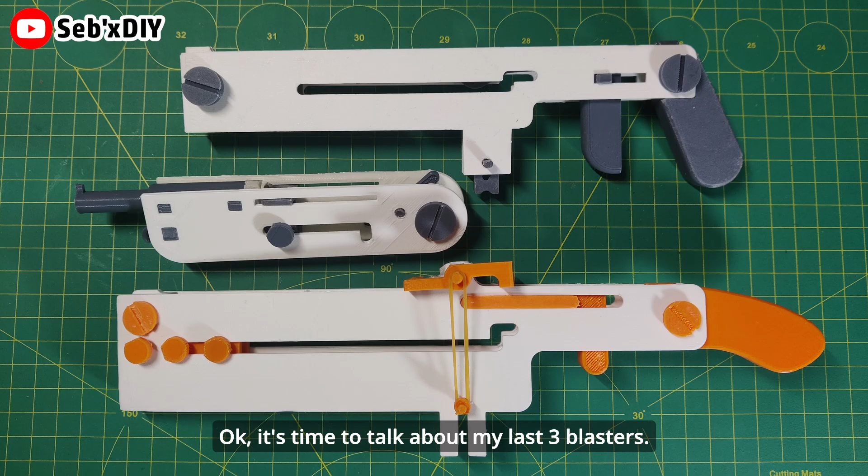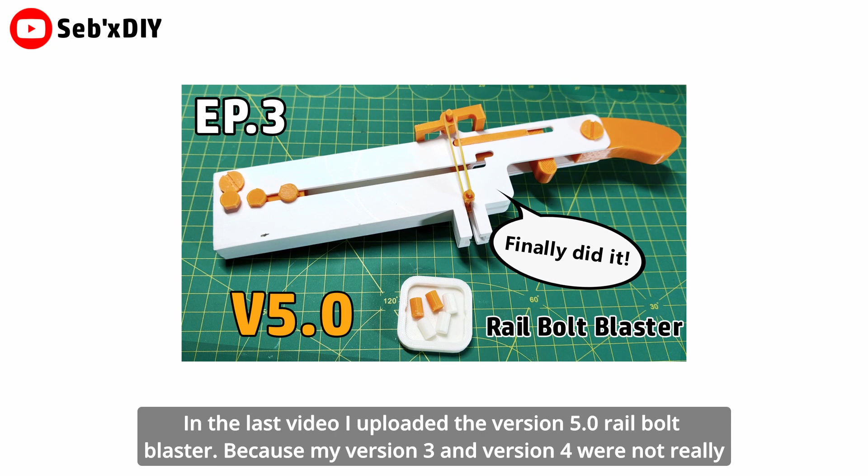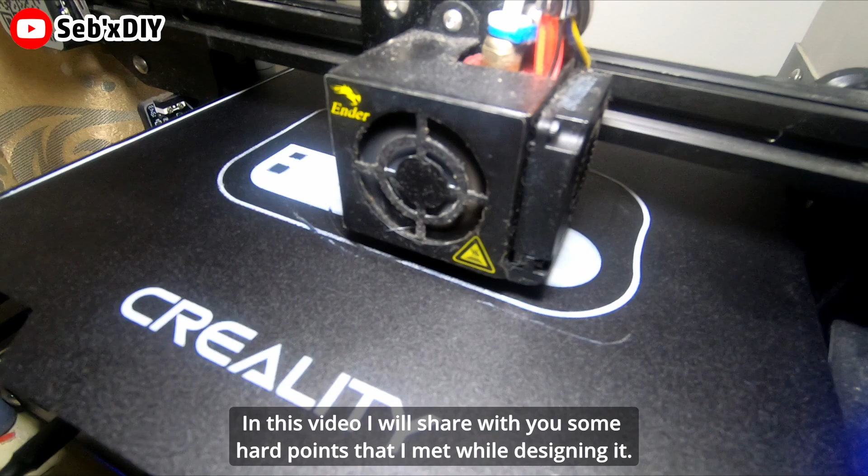Okay, it's time to talk about my last 3 blasters. In the last video, I uploaded the version 5.0 rail bolt blaster. Because my version 3 and version 4 were not really good, I had to continually upgrade my designs. In this video, I will share with you some hard points that I met while designing it.

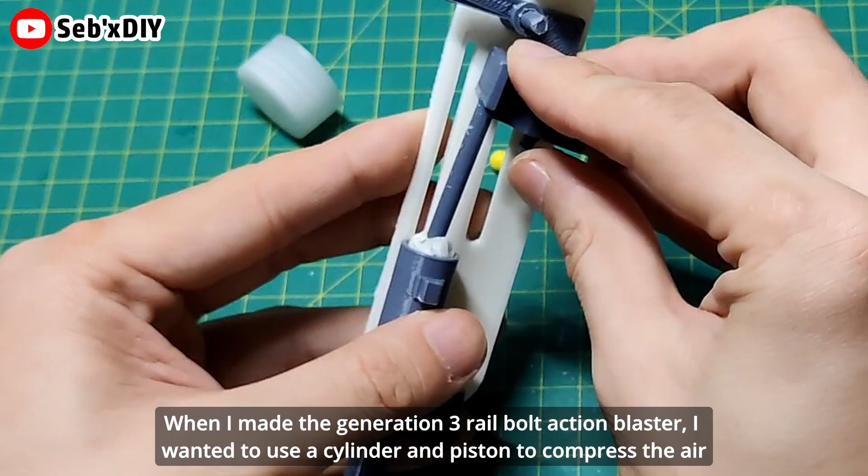When I made the Generation 3 rail bolt action blaster, I wanted to use the cylinders and the piston to compress the air and make the air pressure the power of the bullet, just like a spring power airsoft gun. At the same time, I chose 6mm soft BB bolts as the bullet.

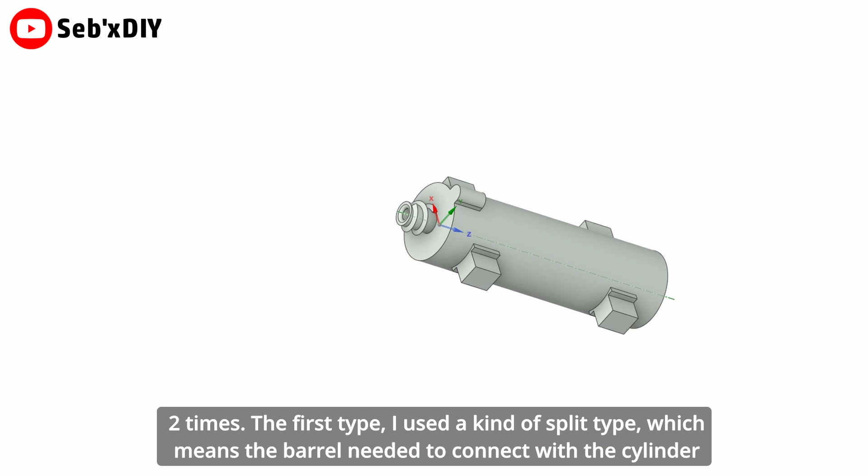Sometimes the plan might be good, but it does not mean the actual doing is smooth. The cylinder I even made 2 times. The first type I used a kind of split type, which means the barrel needed to connect with the cylinder, but because of the disadvantage of FDM type, the joint point between the cylinder and the nozzle was too weak, so the nozzle was broken.

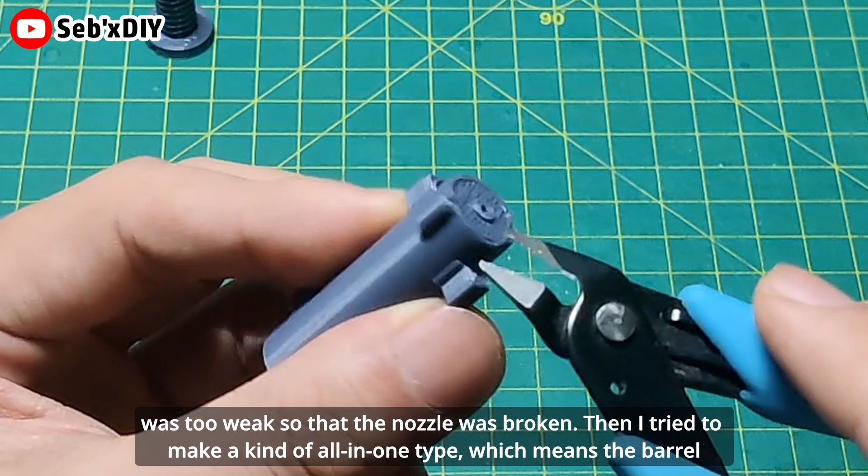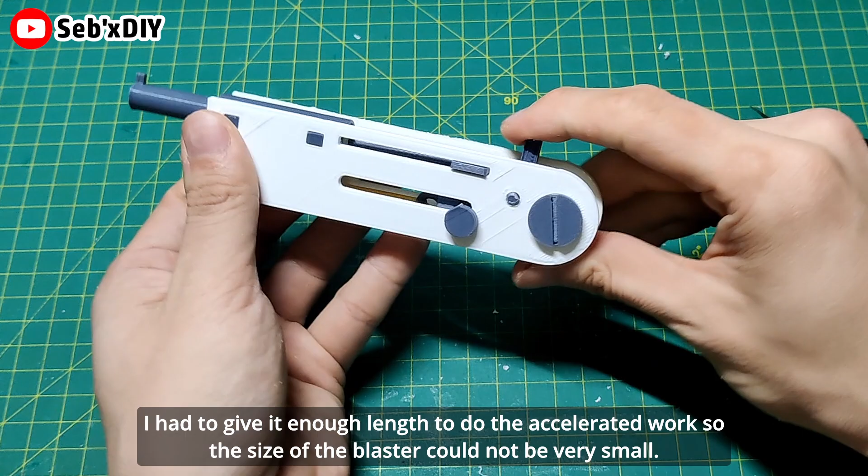Then I tried to make an all-in-one type, which means the barrel was fixed into the cylinder so it could have enough strong structure for the sealing effect, and surprisingly the printing time was not very long. At first I thought I could make a smaller blaster, but because of my 2cm diameter rubber band, I had to give it enough length to do the accelerated work, so the size of the blaster could not be very small.

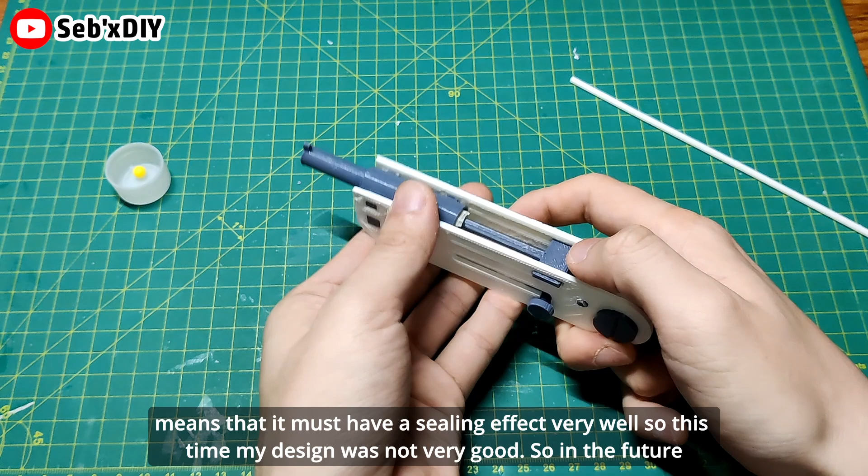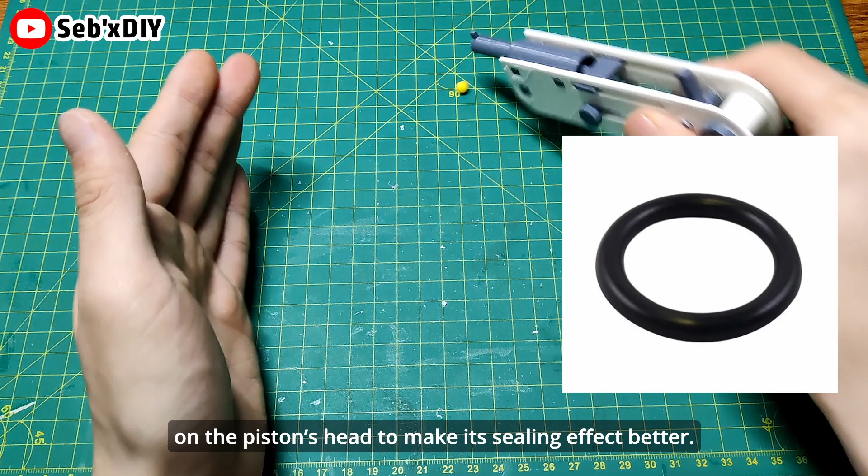Finally, for the version 3.0 blaster overall, it was not good enough, because I tried to use a smaller cylinder, and that means it must have a very good sealing effect. So this time my design was not very good. In the future, if I still want to use a small cylinder design to make a 3D printed airsoft blaster, I will use an O-ring on the piston head to make its sealing effect better.

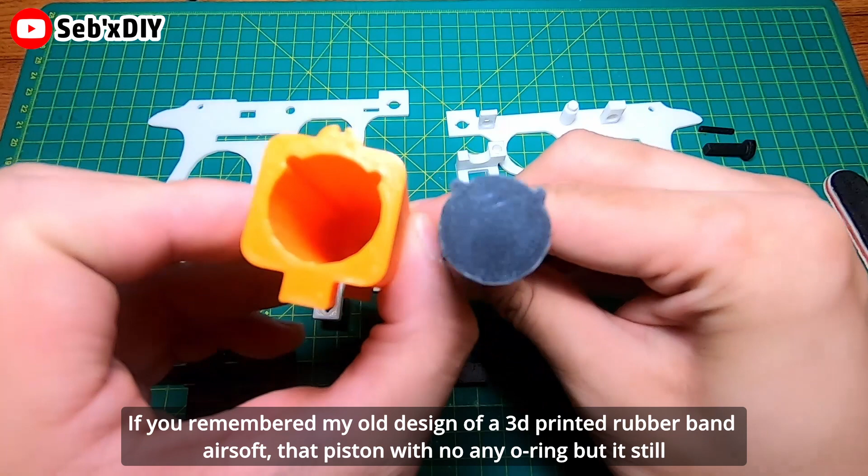If you remember my old design of a 3D printed rubber band airsoft, the piston had no O-ring, but it still would shoot out the soft BB bolts. Because the cylinder was far bigger and could offer much more air, even though it had some air pressure wastage, it still could offer enough air to blow out the BB bolts smoothly.

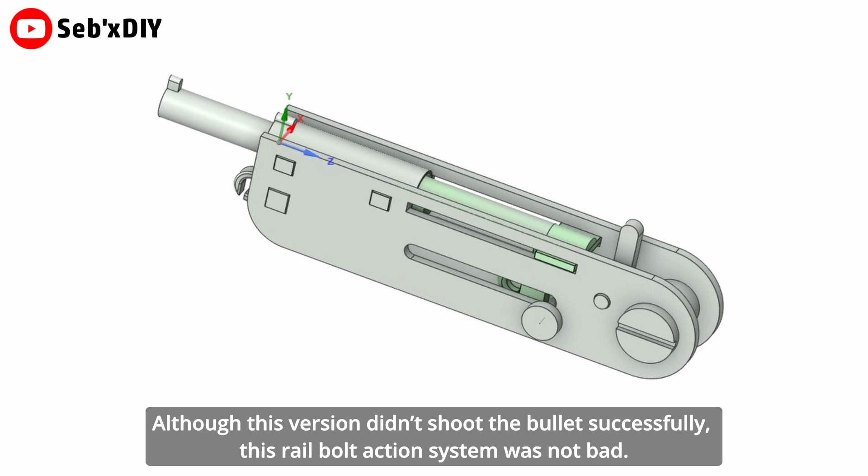Although this version didn't shoot the bullets successfully, the rail bolt action system was not bad. So after deeper training, I think maybe I can design a real 3D printed airsoft gun one day.

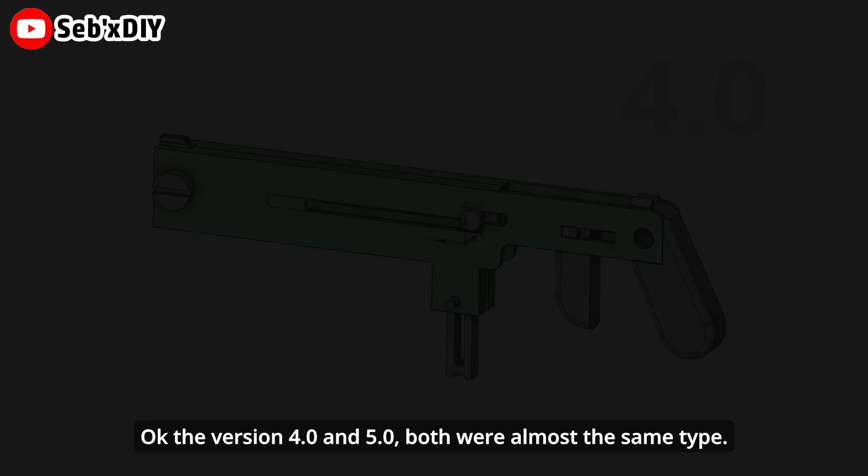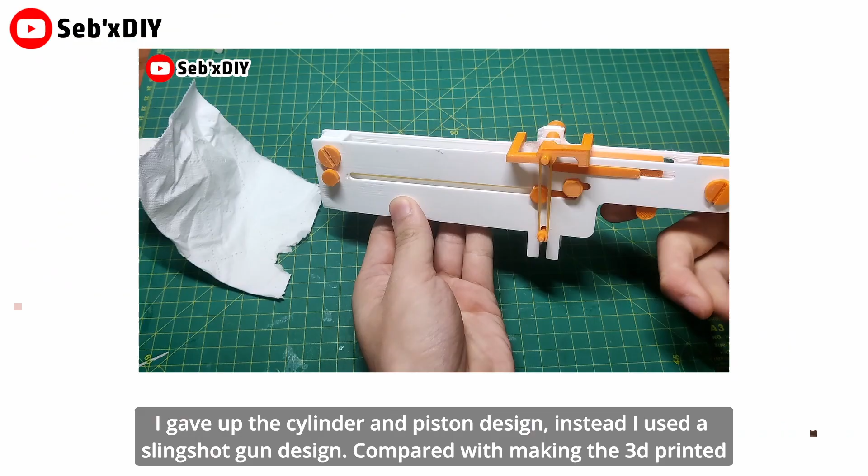Okay, the version 4.0 and 5.0 were both almost the same type. I gave up the cylinder and piston design. Instead, I used the slingshot gun design. Compared with making the 3D printed airsoft, I had more experience in making the slingshot gun blaster.

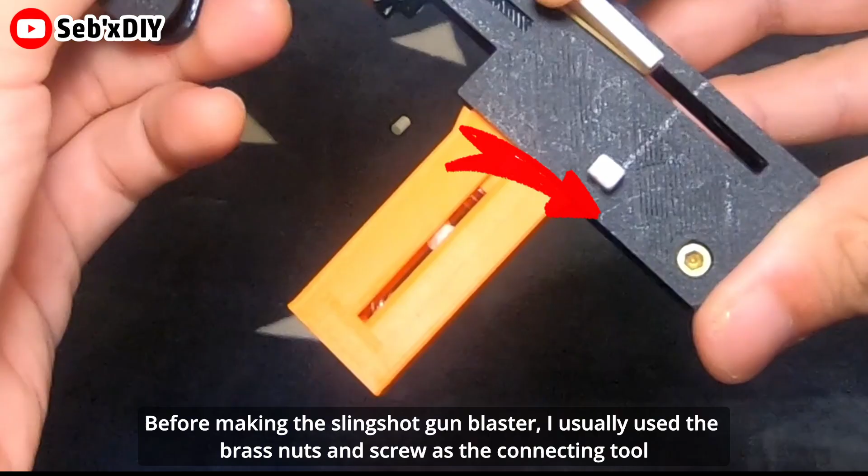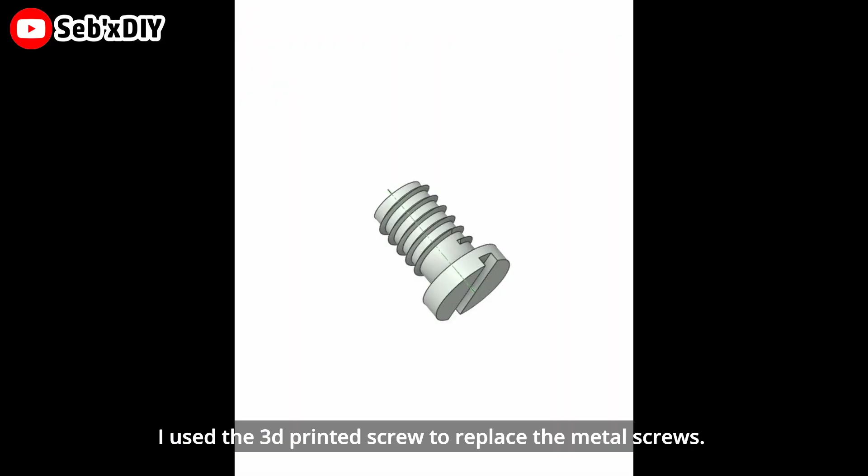Before making the slingshot gun blaster, I usually used brass nuts and screws as the connecting tool to put the parts together. But this time, I decided to design a 100% 3D printed blaster. In order to pursue this aim, I used 3D printed screws to replace the metal screws.

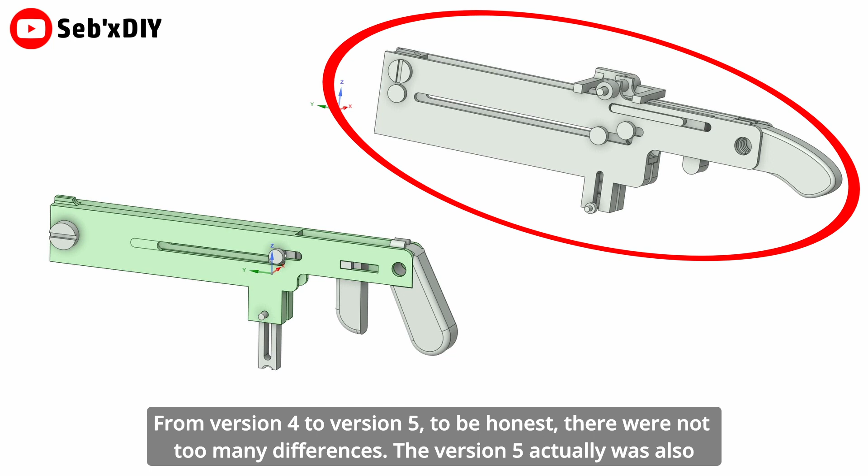From version 4 to version 5, to be honest, there were not too many differences. Version 5 was actually a simplified and improved version of version 4, and I have uploaded the making video of version 5. If you are interested in the v4 and v5 blaster, you can watch it.

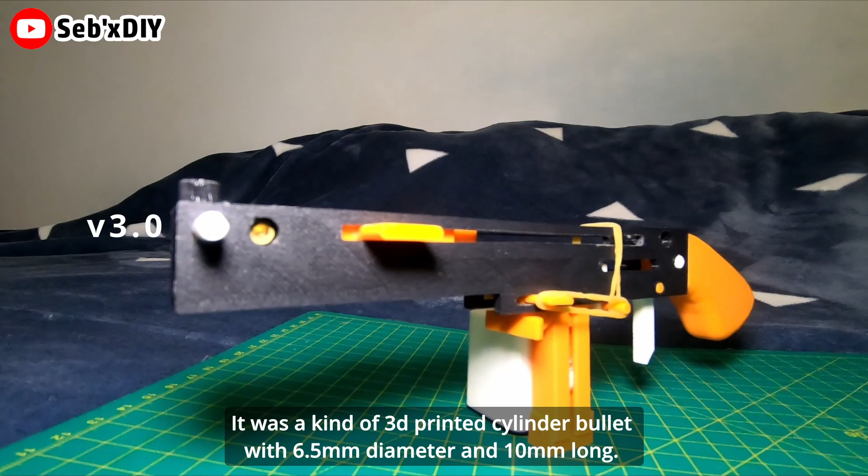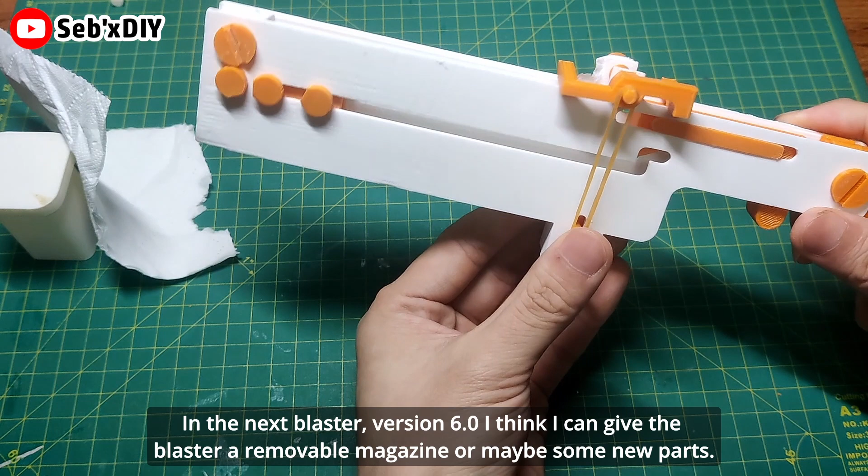Okay, this is this video. In the next blaster, version 6.0, I think I can give the blaster a removable magazine, or maybe some new parts. Hope you enjoyed this video. Have a good day. See you next time.